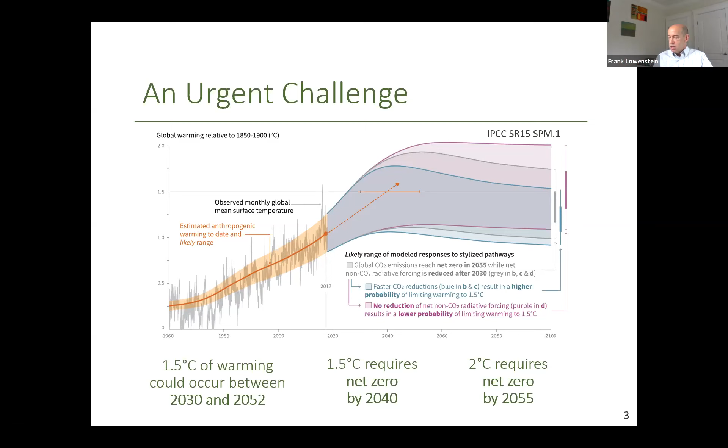The reason for that was well highlighted in a report from McKinsey Global Institute that came out at the beginning of this year. It's long been known that relatively minor differences in average temperatures produce big changes at the extreme. As you shift the average a little bit, events that were previously rare become more common, and events that were previously unheard of start to occur.

Scientists have been forecasting this for years, and now we're actually starting to see it happen. This report, for example, notes that unusually hot summers, which covered 0.2% of the planet per year prior to 1980, in 2015 were occurring across 15% of the planet. Extremely hot summers that didn't occur at all prior to 1980 are now covering half of 1% of the planet. The more we increase the average temperature, the more these extremes come, and those are what are going to damage us here in New England.

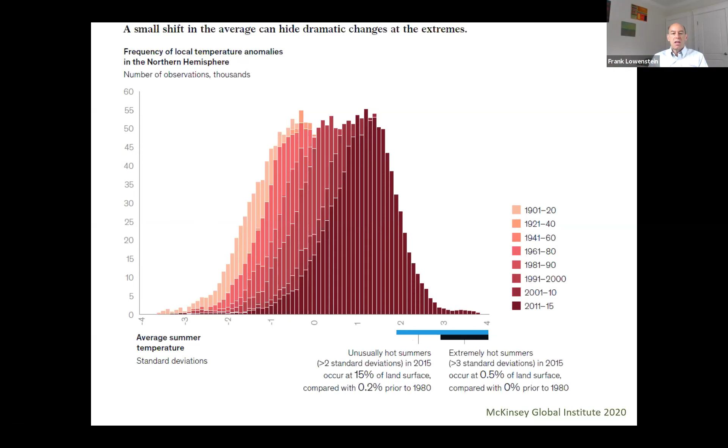Now in Rhode Island, I think we should be very concerned about, of course, coastal flooding and strong hurricanes, but in terms of the forest, we're going to see more heat waves, more droughts, more floods, and more extreme winds and storms. Climate variability is going to increase. So what can we do, and what can the forests do for us to help prevent this?

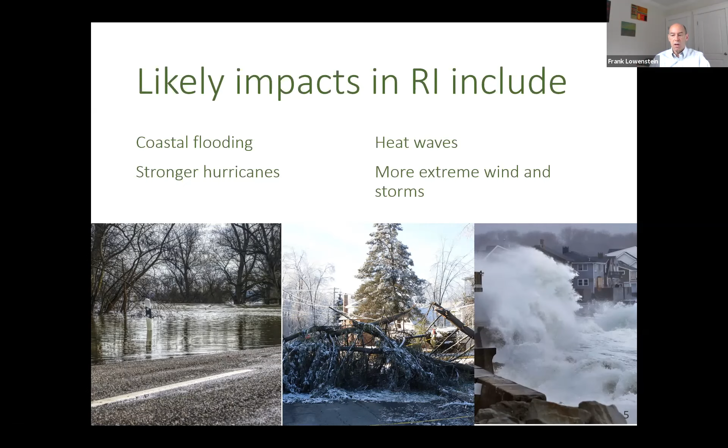Forests store carbon in the boles, trunks, and leaves of trees, as well as in the soils of the forest. They are the best terrestrial mechanism we have for removing carbon from the atmosphere. In the forests of the world today, there's actually stored more than twice the total carbon dioxide that's in the atmosphere. So if we lost all of the world's forests today, atmospheric carbon dioxide levels would more than triple. So we don't want to do that.

That would be game over in terms of climate change. So how do we best use the forest? We've been using forests for a long time, as a source of renewable, sustainable wood products. Those wood products store a portion of the carbon that is in the living trees. So is there a way that we can both optimize the amount of carbon we store in forests and use wood products to store some of that carbon permanently in our products and particularly in our cities? Can we think of our forests and our cities as an integrated system that pumps carbon out of the atmosphere and locks it away?

We at New England Forestry Foundation think we can. That systems approach requires three things. It requires ending forest conversion. It requires improving forestry, improving the practice of how we manage our forests so they store and remove carbon dioxide better and actually also grow more, and using that extra growth for long-lived wood products that we can lock away.

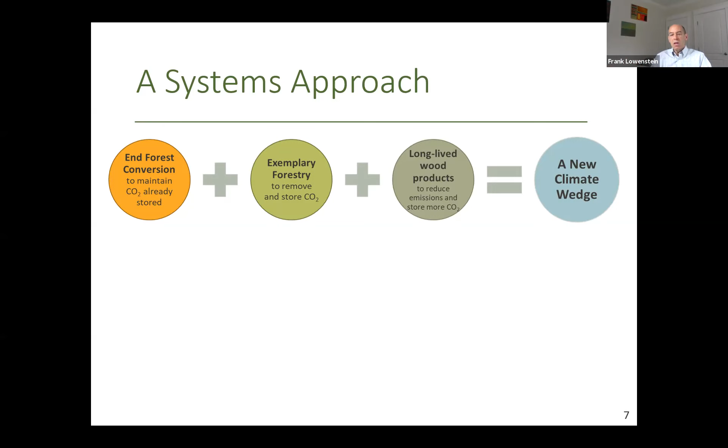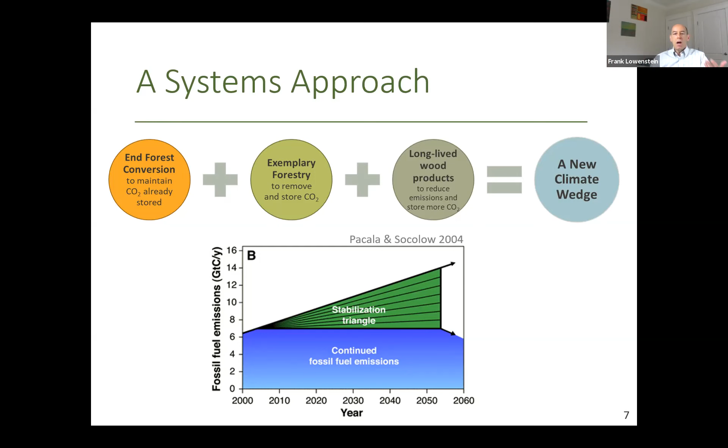And when you put all that together, we get what we call a new climate wedge. For those of you who may not remember it, Pacala and Socolow from Princeton University came out in 2004 with the idea of climate wedges. These were going to be a series of actions that we could take that, when combined, were going to reduce carbon dioxide levels to a point where we could implement new technologies that would eventually reduce or eliminate carbon dioxide emissions.

We think that one of those wedges can be the systems approach to forests. So this is a new graph. I've never used this one before. I think it's my last chart of the presentation.

So the wedge we're talking about combines a few things. It combines improving the management of the forest and storing more carbon in living forests—that's that top blue wedge. The other three—storing wood in buildings, avoiding forest conversion, and avoiding emissions associated with creating concrete and steel—those three are associated with the wood buildings.

Combined, the best estimate that we're familiar with on how much of a difference this could make is from Chad Oliver at Yale, Oliver et al. 2014, if any of you want to look it up on Google Scholar. That study said that to eliminate the total emissions currently associated with the construction sector, around 10% of global emissions, we would need to increase harvest of forests from the current 20% of annual growth to 34 to 58%. By doing that and directing that harvest into efficient wood products, we could essentially eliminate the emissions from the construction sector. That's huge—if you can do something renewable and sustainable and eliminate all the emissions from construction. And if we improved forestry, that percentage of extra growth would be less because we could grow more each year.

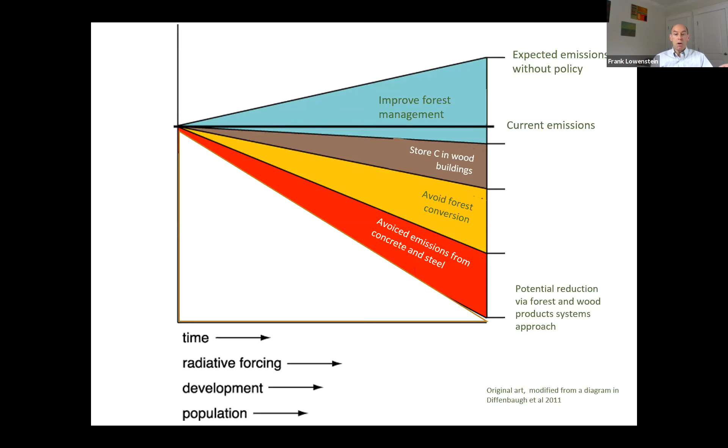So let's dive in just a little bit into this.

Thinking about the first piece, forest conversion, forest conversion is a big problem because you're not only releasing the carbon that is on that land today, but you're eliminating the future potential growth. Currently, across New England and even here in Rhode Island, we're seeing a lot of loss of forest, not just for suburban development on the edges of urban areas, which has been our traditional way of losing forest cover in recent years, but also now loss of forest for solar farms, like the new one that's been approved in North Smithfield. That is a permanent loss of forest storage capacity, a permanent loss of one of the things we can flexibly manage to respond to climate change.

So how do we end forest conversion? Well, land conservation can be a key part of it. New England Forestry Foundation has conserved about 1 out of every 8 acres of land conserved in New England since the start of the land conservation movement in the late 1800s. We have about 1.1 million acres of conserved land, about half again as big as Rhode Island. So that's a good strategy, and that can work—targeted land conservation—but it's not enough. We also need better land use planning, and probably zoning and incentives for landowners.

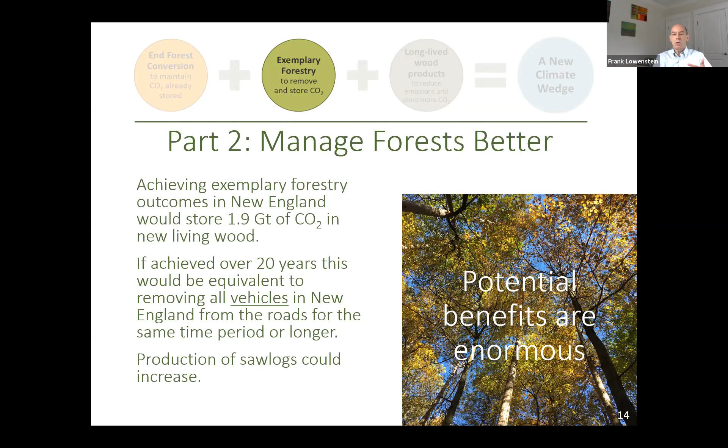So if we did this, how much could it help? Across northern New England, if we applied those Acadian forest standards, we could store another 1.9 gigatons of carbon dioxide in new living wood, and we believe we could do that while maintaining harvest. If achieved over 20 years, that would be equivalent to removing every vehicle in New England off the roads in the same time period—and by vehicle, I don't just mean cars, I mean cars, trucks, tractors, ATVs, SUVs, whatever you want to talk about. So that could be big.

The final piece here is long-lived wood products, and I know David's going to cover this in much more detail. The first piece here is we think there's a tremendous opportunity to build more wood buildings, and we need to do that for housing equity.

The Metro Mayors Coalition in Boston has identified that in Metro Boston, we need another 185,000 new units of housing by 2030—the same time frame as we're trying to prevent going over 1.5 degrees C. How do we do that? How do we build another 185,000 new housing units without cooking the climate due to the emissions from concrete and steel? Well, I've pretty much already told you: the way we can do it is through wood buildings like this one that David's going to be featuring much more at RISD.

These wood buildings help the climate in three important ways. It takes far fewer emissions to build a building using mostly these engineered wood panels—cross-laminated timber, glulam, nail-laminated timber, these new products. Cross-laminated timber has only been used in construction since the mid-2000s in Europe.

It's now approved in the code for buildings up to 18 stories high. That's the 2021 version of the International Building Code, which will be adopted in Massachusetts on January 1 of next year. At that point, you can go up to 18 stories without having to do special studies and permitting. So when you're building with wood, you're not making steel and concrete, you're not heating those materials up to 2,500 degrees Celsius or higher, and therefore you're saving emissions.

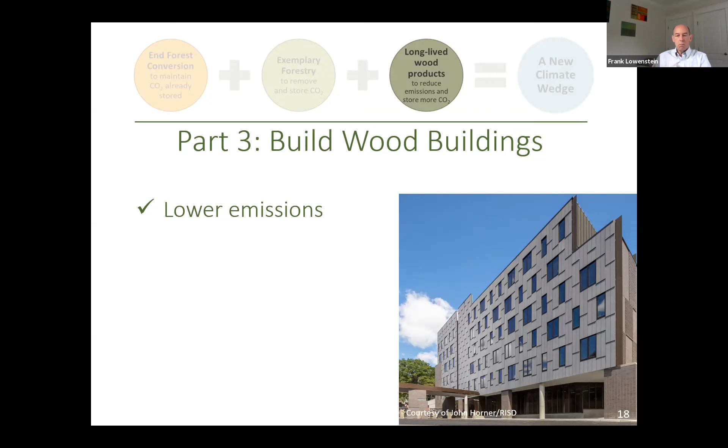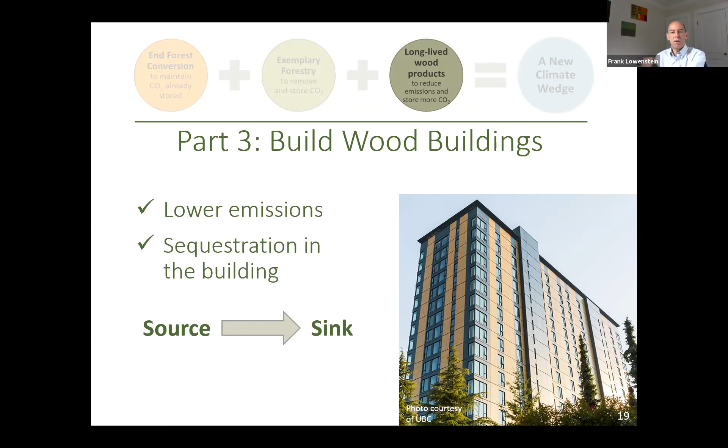You're turning your buildings, between those two efforts, from a source of emissions into a sink—a place where you can store carbon from the atmosphere permanently, at least for the life of the building. And if we think about how to recycle the buildings, how to recycle the wood, turn it into 3D printing plastics, turn it into biochar that we use to increase agricultural productivity, we can really extend the life of that sequestered carbon.

Finally, these new wood buildings are economical in the 6 to 12 story range, which people don't tend to currently build housing in.

By not using that 6 to 12 story range, which is uneconomical to build with steel and concrete and too high to go stick built with, we're losing density around transit hubs. And if we're not having people live near transit hubs, where are they going? They're spreading out across the landscape.

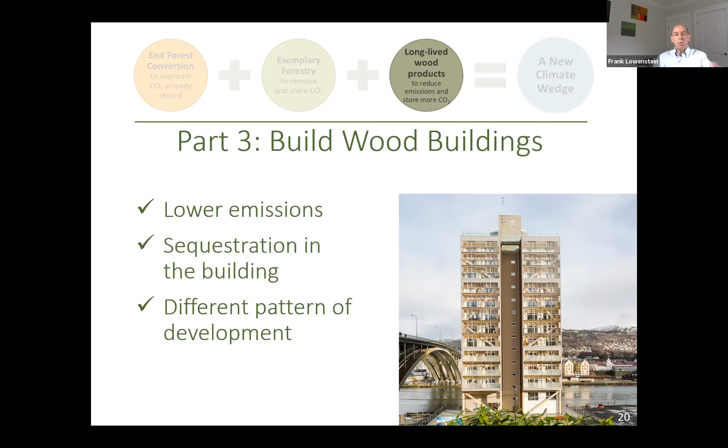This is the Treet Tower in Bergen, Norway. I've actually seen this building. It's beautiful, and it is completely different from current housing in Norway and incredibly popular.

So this is the approach, but it's really important to highlight that it is super important that we source these materials from sustainably managed forests, and they have to be sustainable for climate change.

So eventually that will be fixed. But right now, it's super important that architects and engineers and planners think about how they build sourcing requirements into their specifications that drive not only for that third-party certification, but also for a climate-friendly approach to forestry.

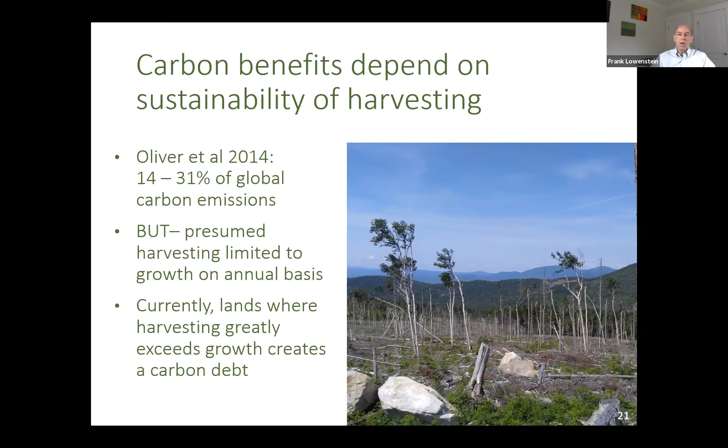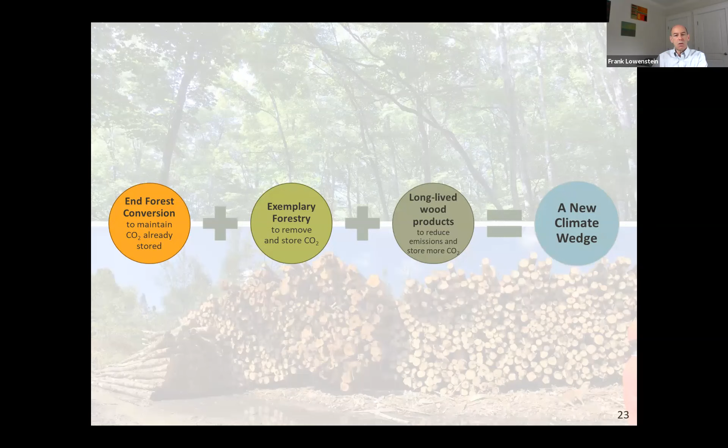We really think that there's a role for both living forests and forest products in solving the climate crisis. We see this opportunity to end forest conversion, which requires policy changes, combined with better forestry, combined with long-lived wood products and these new approaches to construction to achieve this new climate wedge.

And if we can do that, what do we get? Well, we get forest products at the center of climate-driven development. We get more jobs in depressed rural communities. We get more housing with more affordable pricing that can help address some of the income inequalities and racial inequity in society. In addition, I think that you're tying the city to the rural areas, which can help bridge some of the political divisions in our society.

We can improve mobility and reduce future sprawl through more concentrated development around transit hubs and maintain the benefits that we really need from our forests: clean air, wildlife habitat, clean water.

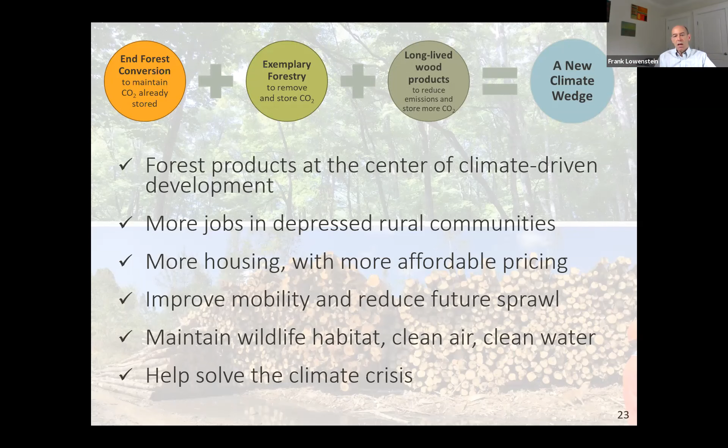And how do we do it? Well, continue to support land conservation. The passage this week of the Land and Water Conservation Fund through the Senate and the House now was super.

Stop and limit conversion of forest land to other uses. With respect to exemplary forestry, we've got to provide incentives to private landowners for them to adopt exemplary forestry, and sourcing requirements can help drive towards that.

And with long-lived wood products, we need to increase both demand for them and the local supply. Right now, we don't have a cross-laminated timber plant in New England. A lot of companies are thinking about building one. They're waiting for a signal that the demand is there. Put it together, and we have a bright future with helping to solve the climate crisis.

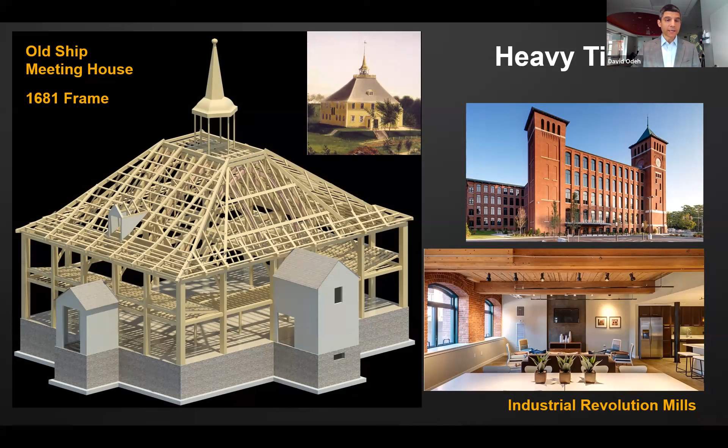Unfortunately, the disadvantage of this construction approach is that it requires very large timbers to build with if you use the historical methods. You need a lot of big trees to make buildings like Old Ship or some of these old mill buildings we're all so familiar with here in New England. That is not a sustainable practice—it takes a very long time for large timbers to grow. That lack of resource led to the preponderance of using mineral-based construction systems instead of heavy timber: steel, concrete, cement, masonry, and other materials made from minerals, as the primary construction system for much of the 20th century.

That is changing because of advances in timber technology, some of which Frank alluded to, that now allow us to use smaller trees and more sustainably harvested wood materials to create better, more structurally optimized timber products. These can be used in construction to solve challenges such as creating long spans like you can with steel, structures that are lightweight and can be very tall, while preserving those properties of fire resistance that are so desirable in heavy timber buildings of ages old.

Generally, such products are now called mass timber. That is the generic name for products that are known as engineered wood products that are laminated together. They're glued together using structural adhesives or finger jointing or other types of joinery to create structural members that are optimized for structural performance. You may be familiar with some of these from the past. It's not a new technology.

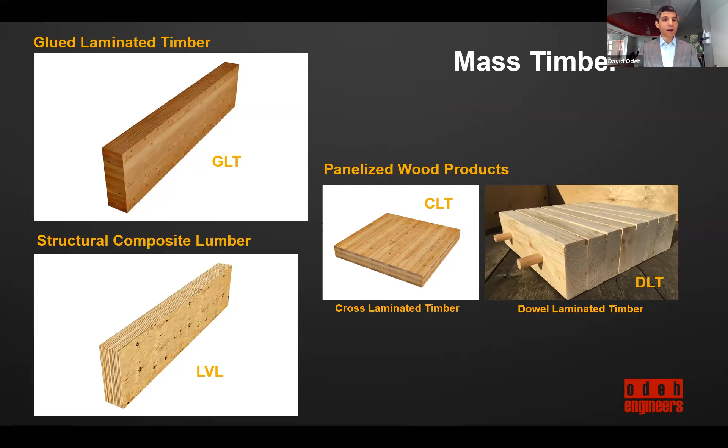But I'd like to focus today on a newer product that's becoming more popular that Frank alluded to as well, called cross-laminated timber, or panelized wood products that are made from smaller structural sections made from green lumber, from smaller trees, that are placed together in large-scale panels, and using joinery techniques can be produced in very long lengths so that they can cover large surfaces and have structural properties that are of use to engineers and architects in building buildings.

The type in particular that's become very popular, popularized in Europe and Austria actually for use in residential construction, is called cross-laminated timber. There are a number of manufacturers of this product in the United States and Canada. Cross-laminated timber in general is a mass timber panel product that consists of what are called layers, or sometimes lamella, of structural boards laid up in a crosswise pattern.

This is similar to the way plywood is constructed, for those of you who know wood construction, in that each layer is orthogonally oriented so that the structural fibers in wood, which do the work for the structure and resist the loads and the stresses, are oriented in the directions that we need them to be in order to best resist bending forces and other forces that we introduce to them.

These panels are very exciting because they can be manufactured in very long lengths. Presses today by manufacturers available to us in New England can make up to 65-foot long panels. They can be 6, even up to 8 or 9 feet wide. So they can be shipped very efficiently to a site, prefabricated, and used as walls, floors, and roofs. They're panelized products that are often used this way.

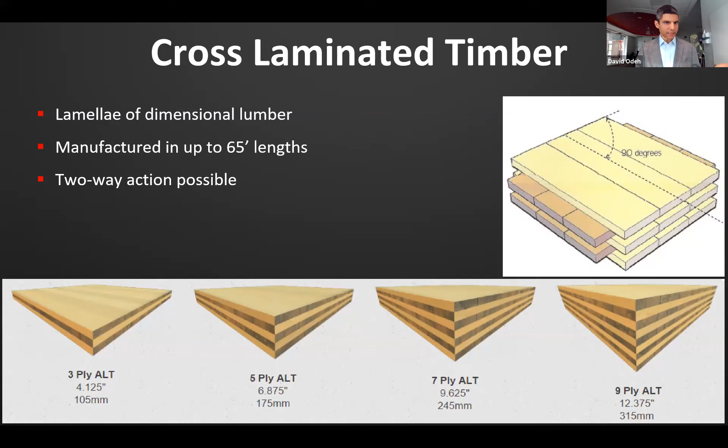For those of you who are designers, CLT, or cross-laminated timber, is a product that's accepted in the building code today, as long as it's manufactured to a joint North American standard called PRG 320 that is accepted in the code. And again, many manufacturers supply products using this.

Why is everyone so excited about mass timber products like cross-laminated timber? Well, I think Frank hit the nail on the head. It's the idea of reducing the carbon impact of building construction. It's been known for a long time in research of carbon emissions that buildings and the built environment account for a very large portion of the greenhouse gas emissions that are the known driver of climate change. Building energy usage as a whole represents about 40% of those emissions. So it's a huge amount.

Over the last 20 years, architects and engineers have really recognized this and focused on creating more sustainable buildings. But a lot of what we've done has not focused on the building structure itself. We focused on the operational energy of the building because, for good reason, the mechanical systems and the use of fuel to operate a building represent a good chunk of the greenhouse gas emissions. But at least 10 or 20% of the emissions are really embodied in the structure and materials in the building themselves.

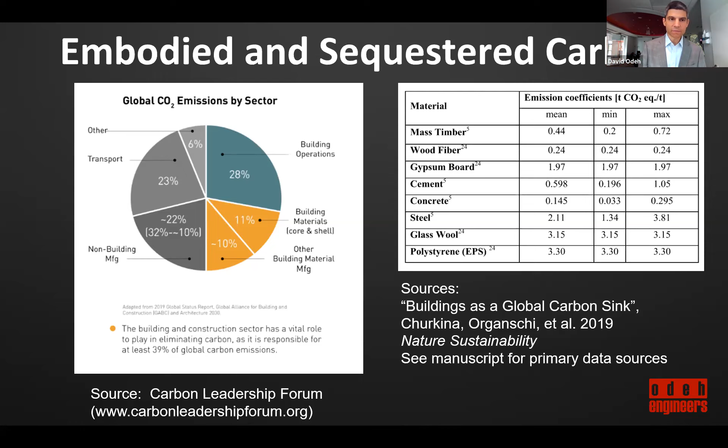So that's a summary of what mass timber is and some of its ecological and sustainability benefits that I think architects and designers and builders are getting really excited about today. Now, how can you actually use these materials? There are newer materials. Some of them have been around for a long time, like glue laminated timber and just solid sawn heavy timber beams. But what about cross-laminated timber and other similar products?

Well, the building code today, through most of the United States, follows a model code called the International Building Code. It's only used in the United States. I don't know why we call it the International Building Code, but that's our conceit, I guess. But this code is exactly what we use in Rhode Island. We use the 2015 edition of it. There's a newer edition, which we haven't adopted yet.

And these codes limit, primarily because of fire resistance, the use of different types of materials based on what's known as the type of construction. And the type of construction limits the height of the building, the area of the building, and the number of stories of the building that you can build. You may be familiar with light frame wood construction, which is very popular right now in Rhode Island and throughout New England. Light frame structures are typically either type 3 buildings or type 5 buildings. Both of them allow the use of combustible materials, which wood always is. But you can see they have height limits depending on the occupancy that you have.

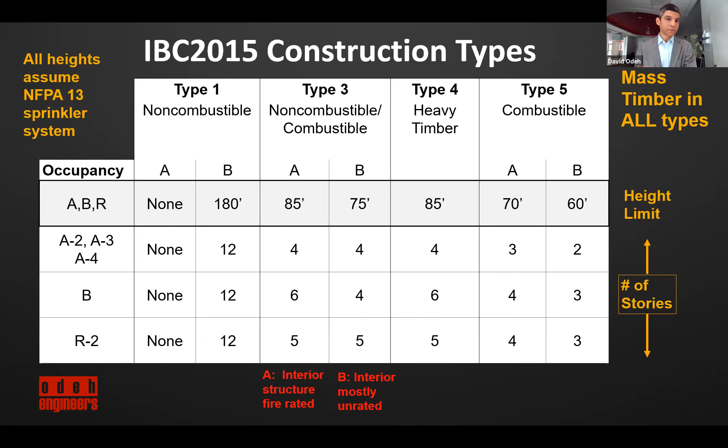But right now, type 3, 4, 5, you can go up to 85 feet, depending on the use, up to 6 stories with cross-laminated timber and glue laminated timber structures. Or, as we'll see with RISD, as a little foreshadow, a hybrid of combustible construction like cross-laminated timber and steel.

Now, Frank mentioned that coming down the road, a very exciting change in the code is going to happen. It's already been approved by the International Code Council for 2021. Remember, we use the 2015 edition of the code in Rhode Island right now. The 2021 edition, which will be available this year for adoption, creates 3 new categories of heavy timber construction that will allow you to increase that height limit from 85 feet all the way up to 270 feet.

So these 3 new types of construction allow you to use fire-protected mass timber columns, beams, and cross-laminated timber or dowel laminated timber panels with these height and area limits for different types of occupancies. So in theory, should Rhode Island, Massachusetts, and other municipalities adopt the code for 2021, we may start to see taller and taller mass timber buildings being constructed throughout the region.

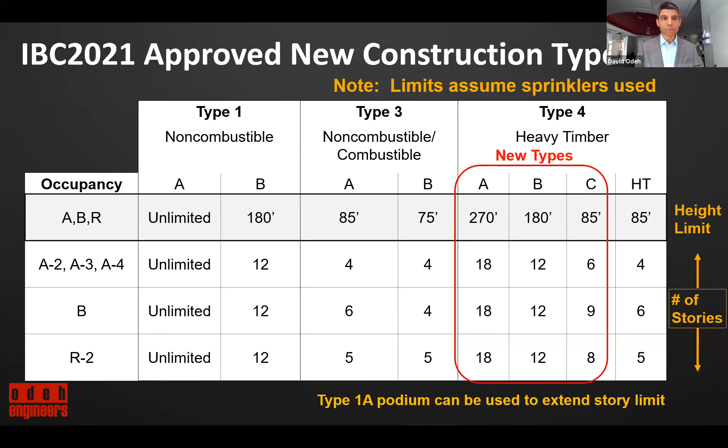Here at Odeh Engineers, we're working on a lot of projects right now that are trying to take advantage of these allowances for taller buildings that are coming in the building code for laboratories, office buildings, residential buildings, largely because of the benefits of sustainability and because of, frankly, the value, some of the cost effectiveness that I'll show you can be achieved with mass timber construction for buildings that are carefully thought out.

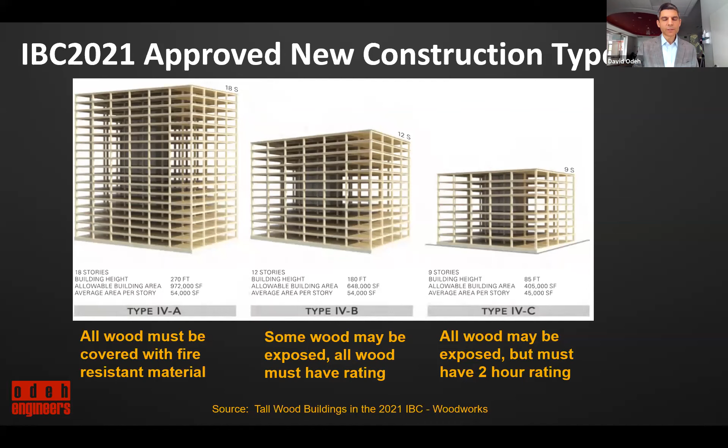Okay, so this is just kind of a summary of some of those new types of buildings that are going to be approved. Okay, I'm going to now switch to talking specifically about the example of the RISD project. I want to show you how we built a real building here in Rhode Island out of mass timber. And why we did, and give you some of the characteristics of that building that I think made it very successful as a project.

Every project has to be successful on multiple fronts. It can't just be because we think it's more sustainable or just because it costs the minimum amount. It has to meet a client's objectives and challenges. And in the case of RISD, RISD, as I'm sure everybody knows, is one of the nation's great design institutions, one of the world's great design institutions. But its dormitories needed some refreshing.

Shawmut Design and Construction was the builder of this project and the manager of it, along with a variety of other consultants that really participated.

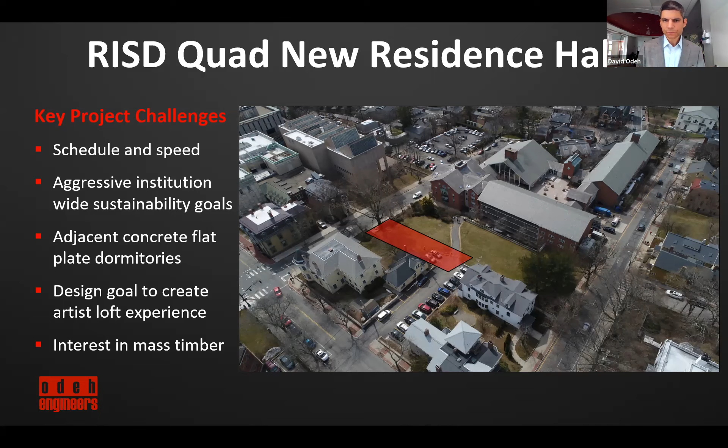The school really wanted to create a new student life experience, one that underscored and resonated with RISD's goals for sustainability overall in its program, both in its teaching and research, and its student life experience. Mass timber really turned out to be desirable from that standpoint.

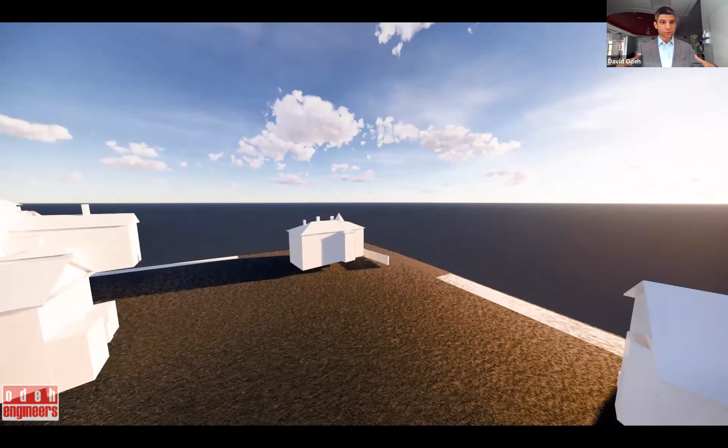This is a model that we, the design team, made, a three-dimensional model before we constructed the building to help design it. You can see here how we chose as a team to construct it. The structure is built into the hill with a concrete structure at the ground level, which is mostly underground. Above that level, it consists of steel beams and columns supporting cross-laminated timber slabs or panels. I'll show you in a minute some of the construction advantages of using that approach.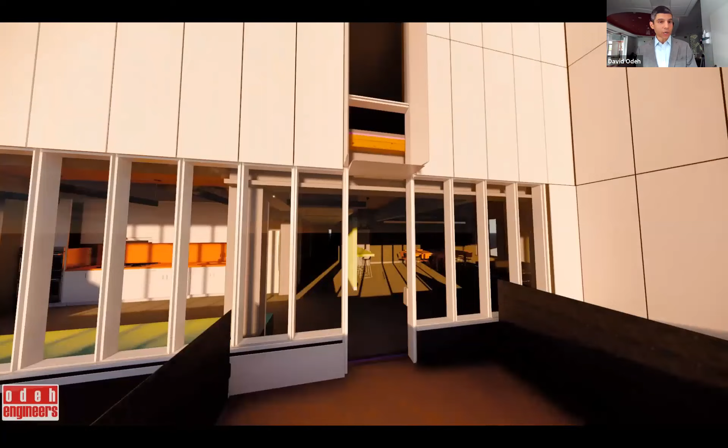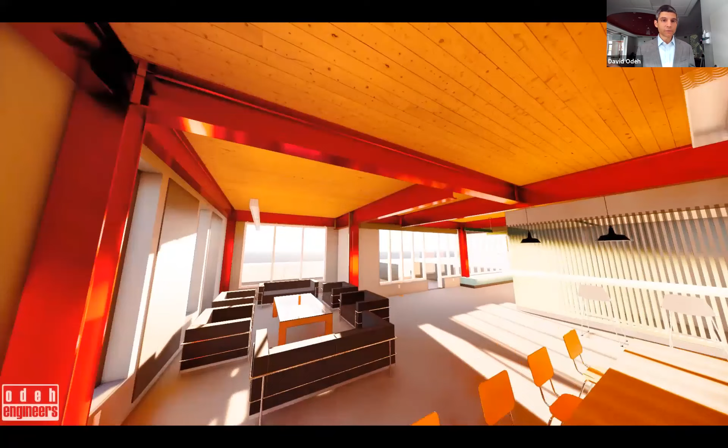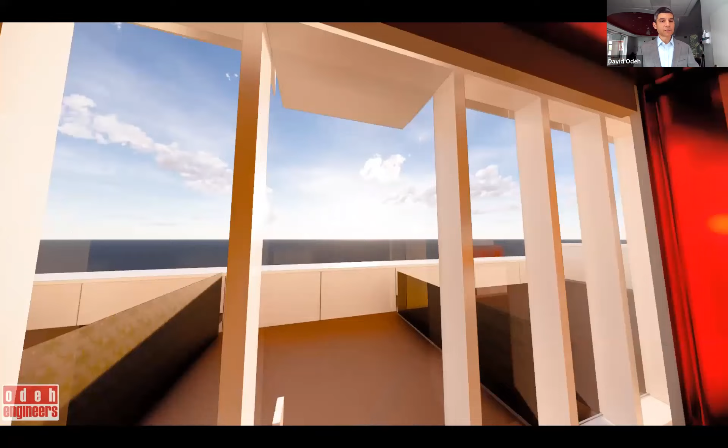One of the key advantages the school recognized right away from using models like this is that there could be great beauty in exposing the structure and showing off the structural system. Wood, in addition to being a sustainable material, has also been shown psychologically to have very positive effects in residential environments. People want to be in nature, and they enjoy seeing wood—it's an effect called the biophilic effect. I'll show you some photos of this, but some of these rooms and amenity spaces have just beautiful views of downtown Providence, which in my own humble opinion is among the most beautiful urban environments in the world.

So here's how the frame came together. We used cross-laminated timber panels to build the floors. The structure is a type 1B construction, so going back to that table from the building code that I showed you, that's for the bottom part. The upper levels, the five stories above that, are built using type 3A construction. That meant we could expose the structural steel and the cross-laminated timber on the interior of the building. We had to have a non-combustible exterior wall system, which we created using a metal panel and masonry system and steel studs, and I'll show you the beautiful design that Nada came up with for that.

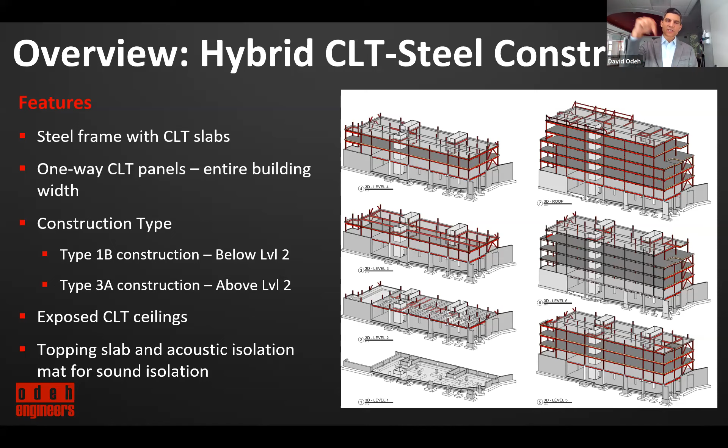Finally, the floors themselves, although they're exposed wood from the bottom, on the top have a thin slab of a cementitious material covered by an acoustic isolation mat. That's in order to prevent sound transmission from floor to floor—an important issue in the design of wood structures.

So here I have some photographs of the building coming together during construction. What I want you to notice is that the contractor was able to erect the building very quickly because they built the steel frame structure in multiple floors at once. The steel erector, using a very light crane because the steel was very lightweight, built two or three levels of columns and beams at a time. Then, if you see that truck with the white panels on the left side of the screen, those are the cross-laminated timber panels shipped from Nordic Structures, a company in Quebec.

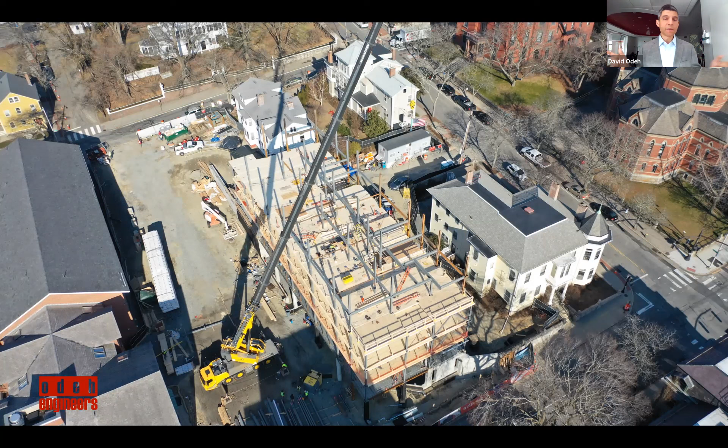They make the product we used for this project, and they were a key part of our team. Those panels span the entire width of the building—almost 55 feet long and about 6 feet wide. So each panel could be laid on top of the steel by the contractor just by craning it into place, and then screwing them to the steel beams, as I'll show you shortly.

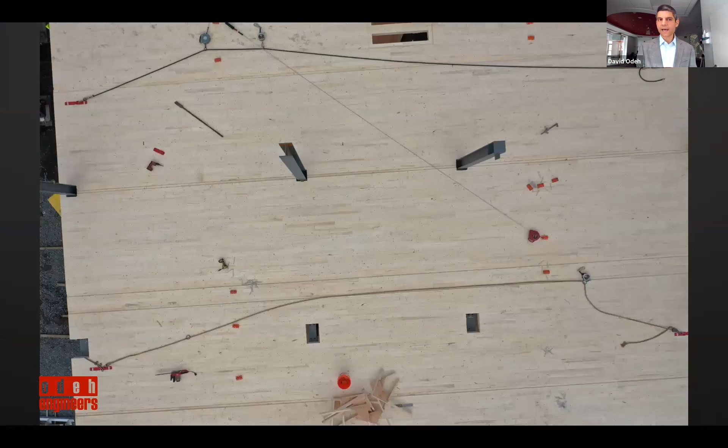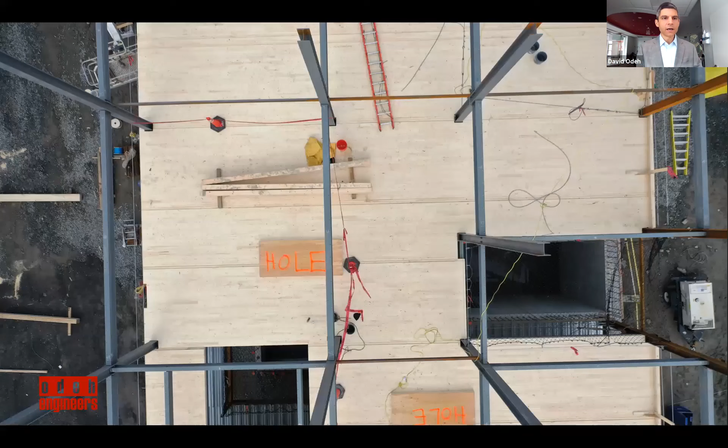This is a very rapid form of construction, extremely fast. You can see Nordic in their shop when they fabricated the panels—this is a drone view from the top, from one of our drones that we use for construction observations. They pre-cut the holes for the columns and laid out the joints between the panels such that they could quickly be placed without a lot of fussiness during construction.

Here's a quick video that shows one of the most complicated panels on the job, and how quickly the contractor was able to put it into position using the crane. Just two iron workers laid the panel into place, pre-cut with openings around the columns, which are two stories high, so they could drop it in and slide it into place.

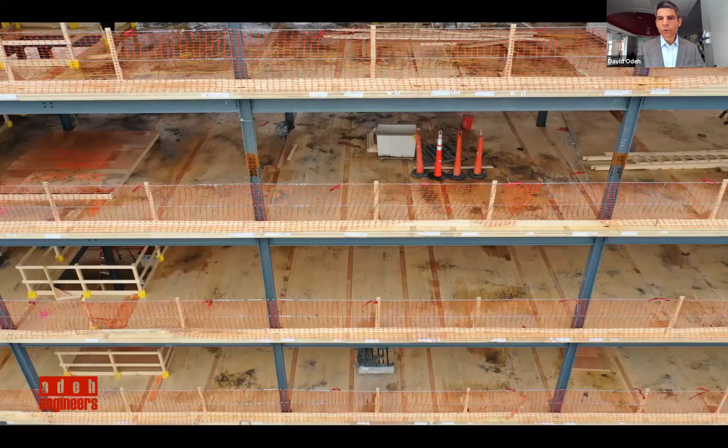In between the columns, the steel frame, lateral bracing, columns, and CLT were all constructed by the same erector, HB Welding, a great Rhode Island company and partner. We worked very closely with them to facilitate construction practices that would make building this building as rapid as possible.

Using that technique of placing long, prefabricated panels into place with steel members carefully considered to minimize the number of connections the contractor needed to make in the field, allowed this structure to be built even faster than we had imagined.

It's a 50,000 square foot building, and the contractor erected it in 2.5 weeks. That's really record time for this type of construction, and it's given this project a lot of attention and interest.

CLT, the material itself, may be a little more expensive per square foot than using, say, concrete planks for this building, or a cast-in-place concrete slab on a deck, which is the system that probably would have been considered before the existence of mass timber.

But if you can build with such speed that you save literally months of construction time sometimes, that savings in schedule, combined with other benefits, can actually make these systems more cost effective than using just a plain steel and concrete structure.

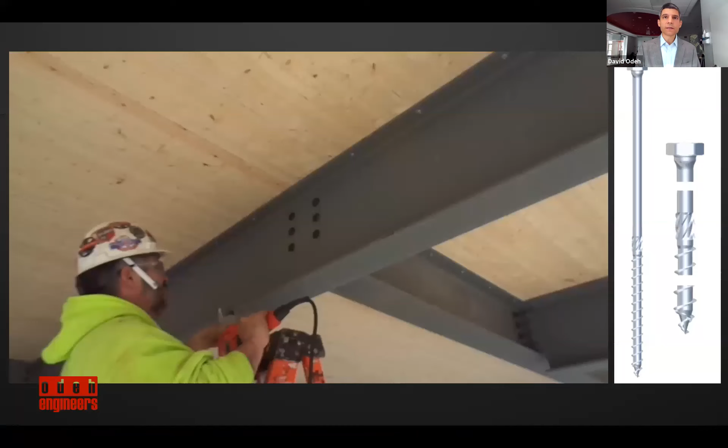So this was a huge win for the client and for the team, and I think it allowed us to really make the project a success.

Once the panels are erected in place, it's very easy to connect them. In this case, we used self-tapping lag screws. The wood framers who came in afterward and did all the detailing work were able to install them very quickly — this is literally how long it takes to install one of these bolts. They're not in pre-drilled holes, so there's no drilling; the lag screws just go right into the framing.

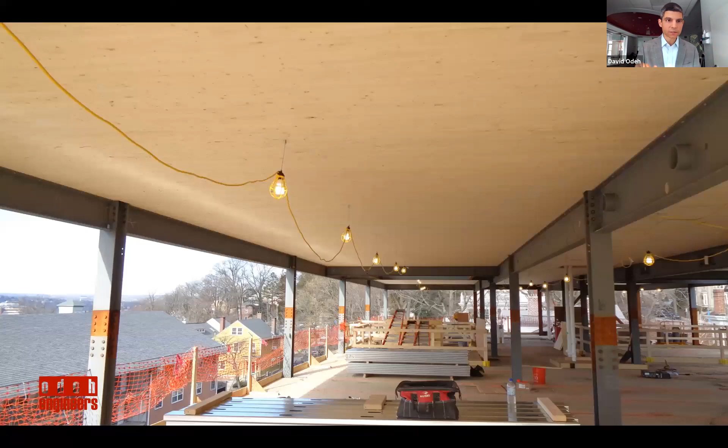Furthering the sustainability benefits of the project is the fact that there are no ceilings. The ceilings are exposed, with the beautiful underside of the cross-laminated timber panels. So we didn't need to use gypsum, a mineral-based material with a high embodied carbon content, to create ceilings, which would normally be the case in a steel deck building of this type, or a light frame structure.

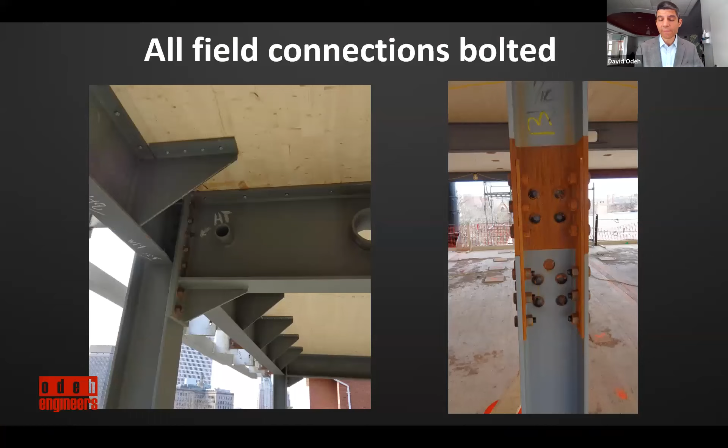And these are just some more details to show you how the structure comes together. It's beautiful on the underside of these structures.

Cross-laminated timber, because of the method of cross-lamination using orthogonal layers of wood, means the panels can actually span in two directions. They're almost like a membrane or a diaphragm. That's an excellent structural property that allows us to create openings in panels and even between panels without a lot of beams or supplemental framing underneath. That's very important because it creates a clean, low floor-to-floor height structure.

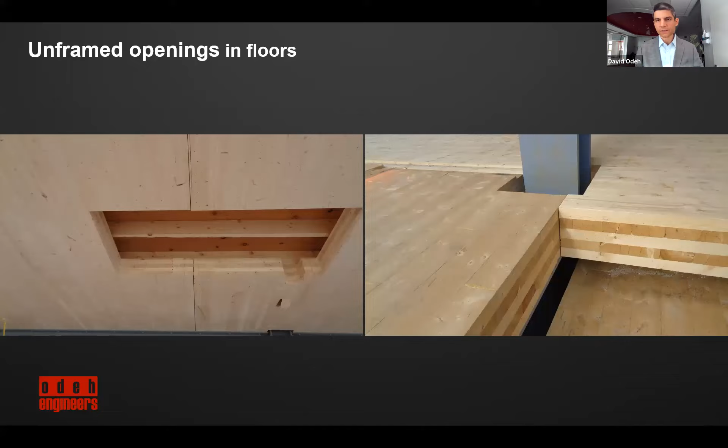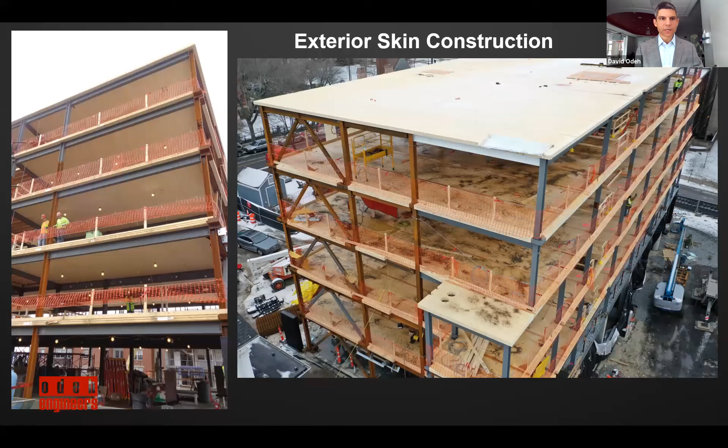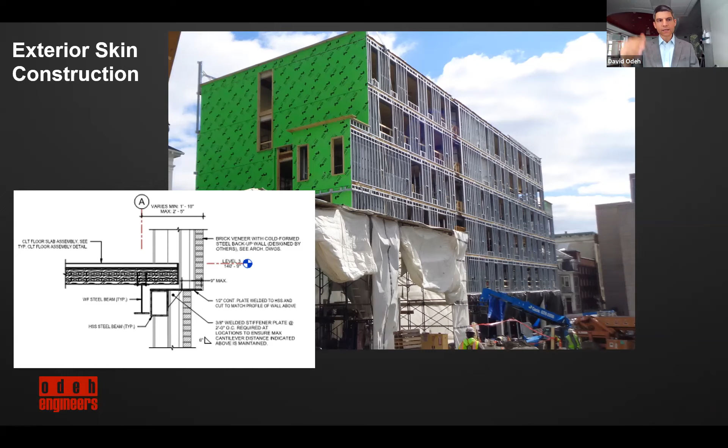I'll show you a few pictures of the exterior skin. The cross-laminated timber, even in a Type 3A building where you have to have a non-combustible exterior wall, is allowed to penetrate through that wall as long as there's a fire-rated assembly created at the ends. You have to protect the cross-laminated timber.

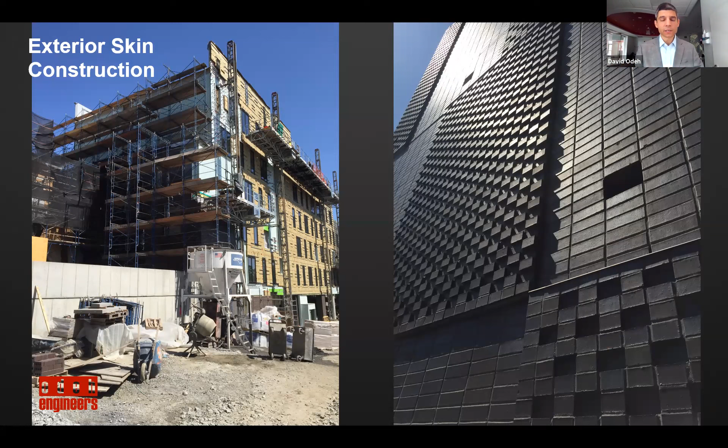Using the hybrid of steel and wood allowed us to do some very beautiful masonry work on this building. As you drive up College Hill, like Waterman Street, you see these beautiful masonry facades that are very modern but also evoke the tradition of historic architecture on Providence's east side. That requires a lot of in-and-out variation in the brick veneer, which is easily achieved using steel.

So with that, just in summary, I think mass timber is a really exciting building material because of its sustainability benefits, but also the productivity and efficiency of building with mass timber. It's not just about the embodied carbon in the mass timber, it's also about the speed of construction and the design benefits that can be achieved from using it.

Here at RISD, and I know there are a lot of projects in the planning phase, we're working on some of them ourselves at other nearby schools and for other developer clients where we'll be using a similar system. If you want to see one under construction right now at Brown University, I'm not the engineer for this project, but the new dormitory that Brown is building on Brook Street is being built using almost the exact same system as this. So you can see one of these projects under construction.

So with that, I'll hand it back to Scott.

Thank you, David. That was really good. I know I learned quite a bit, and it's exciting, I think, for all of us to learn that what Frank is advocating for is very doable. It's happened right here in Rhode Island, and with innovative engineers like yourself, we hope to see a lot more of this in the future because we need it.

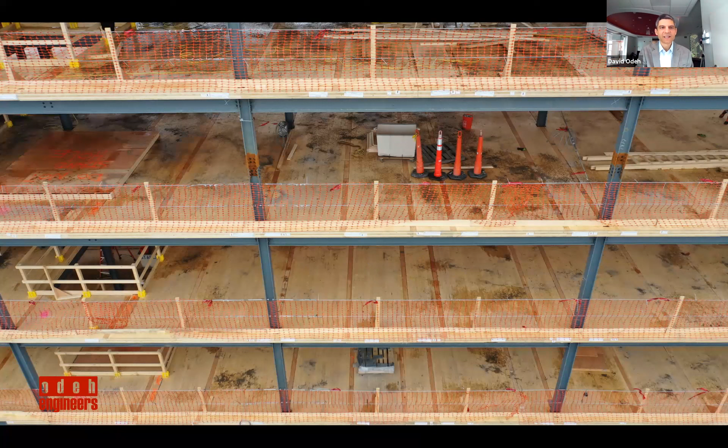If you let me, I'll just share my screen one more time here, and I can kind of show you a little bit of how it works. But if you notice these lines on the screen in the parallel directions of the panels at their joints, those are spline joints. So there's a reveal left between each panel, and a small piece of plywood is placed and screwed to both sides in the field. That's actually a very simple technique of connecting the panels together.

You can kind of see the spline joints here before the plywood strips have been placed. Connecting them like that allows the panels to behave as a diaphragm as well, so they do the work that traditionally a concrete slab might do structurally.

It's the preferred and rapid method of building them. They're not set together like traditional heavy timber decking with tongue and groove joints. Their splines are on the top.

I'll speak briefly. New England Forestry Foundation has two websites devoted to this topic. Our forest2cities.org site has just been updated and renovated, and I encourage you to check that out. Our builditwithwood.org is going to have more resources and more in-depth information, with a blog that links to the latest studies as they come out around the forest and CLT connection.